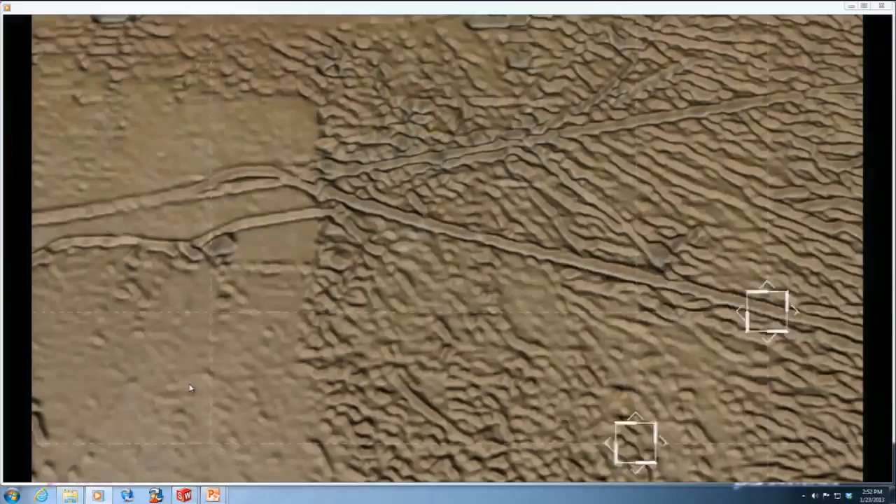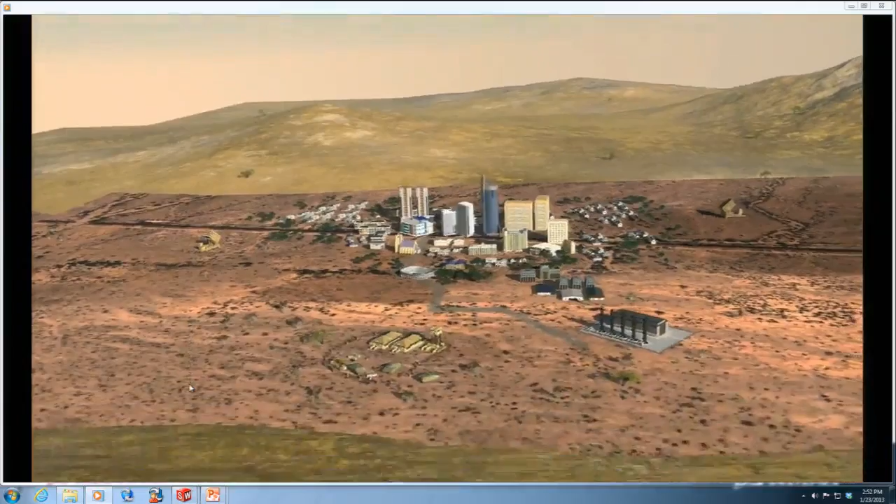The system is mobile, deployment is rapid, and maintenance is simple and user-friendly. A single launcher protects the area of a medium-sized city or strategic installations. The system can protect stationary or mobile forces against short and medium-range threats.

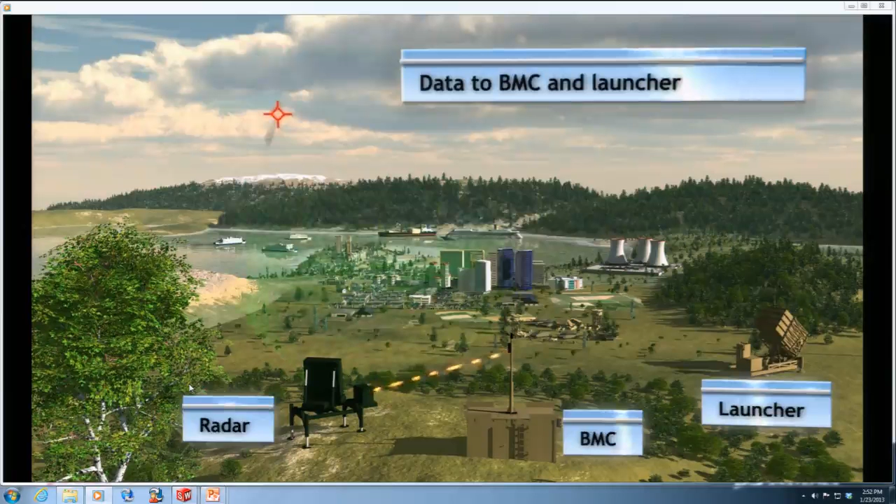The radar detects and tracks the threat. The data is transferred to the BMC and to the launcher, and from launcher to interceptor. The interceptor seeker achieves very accurate end-game homing.

Fully linked to other command and control systems in the arena, Iron Dome exchanges data with other sensors to maximize its combat efficiency and avoid fratricide.

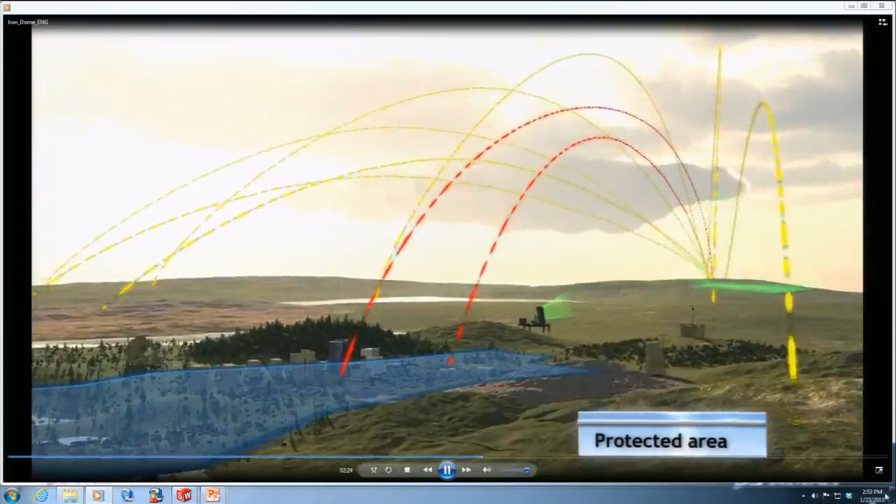The system estimates the tracked threat's point of impact and selects to intercept only those that will fall in the protected area. This prevents unnecessary launches against non-threatening targets and makes Iron Dome a very cost-effective system.

The innovative system has proven its capability to detect and home in on small targets flying at high speed and over a large area, even in severe weather conditions.

Iron Dome operates automatically, day and night. The system intercepts all short and medium-range threats and destroys them safely outside the protected area.

The detonation of the revolutionary interceptor warhead is precisely timed to ensure destruction of the incoming threat's warhead.

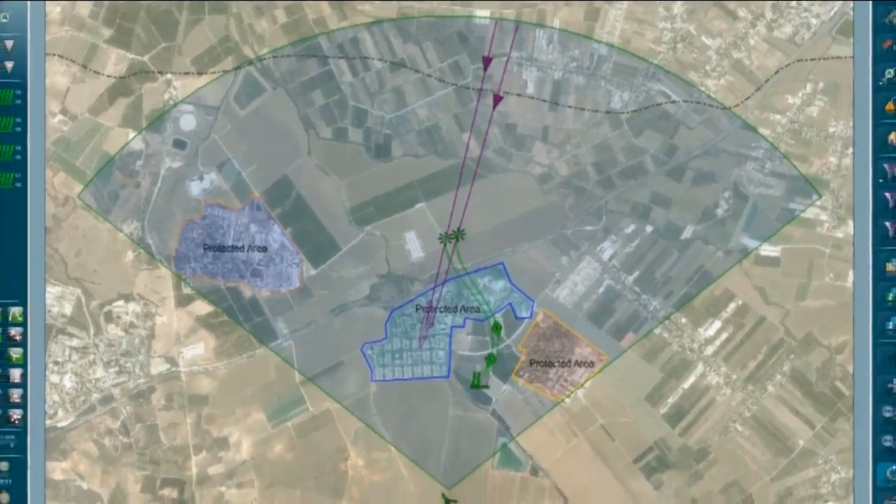At an unprecedented pace, Rafael has developed the first-of-its-kind and only operational system in the world for the interception of a wide range of short and medium-range rocket and artillery threats.

Iron Dome is a very cost-effective system, selecting out of multiple threats and concentrated salvos only those threats that endanger the protected area.

Groundbreaking technological innovation to eliminate the threat of rockets and artillery, and to provide civilians and armed forces with the security they need and deserve. Iron Dome.

Okay, that was just a bit to understand the importance of time to market and getting out a good product.

In mid-November, during Operation Pillar of Defense, which was not very fun for us, Iron Dome intercepted hundreds of rockets that didn't land on our people. So that's just really important.

Okay, now that's Rafael, and let's understand what our environment is like at Rafael when we go back to the CAD.

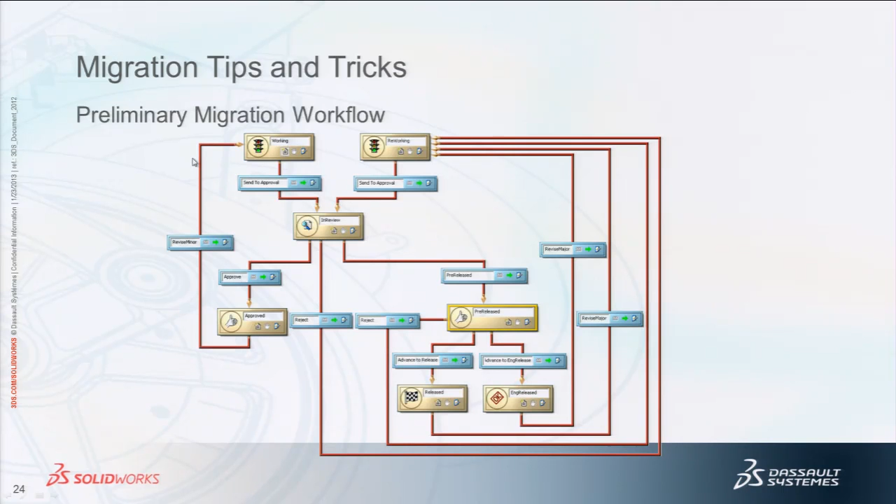When you remember that simple flow that I had shown before of what the statuses in workgroup were like, that's basically what we thought we'd have to set up in the workgroup, in the migration workflow. But, I mean, this is what we thought it would look like. A little bit more than what we had before, but that didn't quite work out.

This is what our migration workflow looked like. But don't worry, everything went through all that spaghetti. We always used to call it the spaghetti workflow. This is just because in workgroup, you can change every status to every status, and it just happened because someone called us and said, well, I can't do something, and then we would look at it and say, okay, I guess we'll move it to that different state, and then you'll be able to do it then.

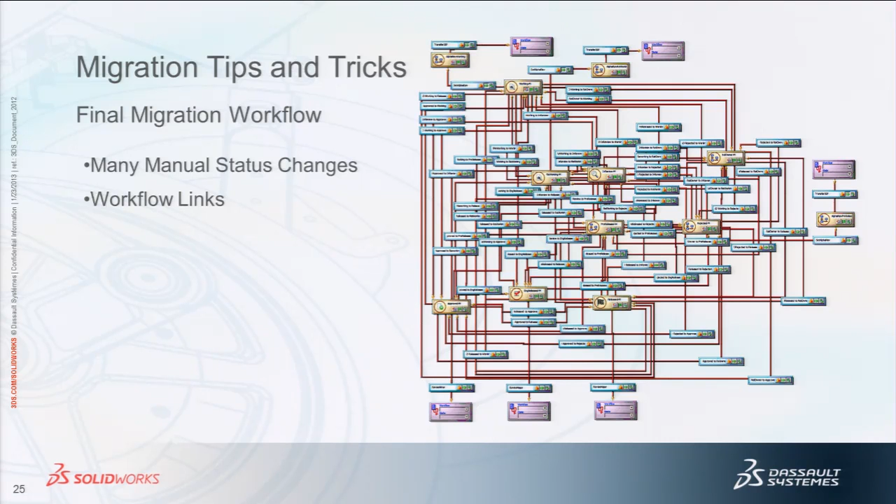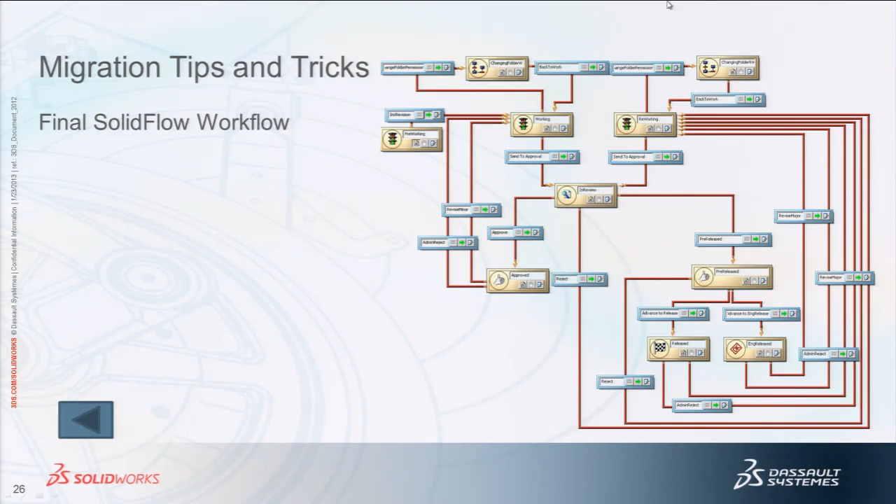So basically what we did when we were setting up the migrations is we created an empty vault and we set up all user permissions that we needed, and then for the groups we set up what permissions we would need, all the different settings on the vault that we would need. And then we exported this into an export file, since we have 6 vaults, so each vault we had to migrate separately, so we had to make sure that we would keep it as unified as possible.

So we would export, we put together the whole vault the way we needed it, all the permissions and settings that we wanted, and then we exported this. We set up a whole Excel file of exactly what permissions each group needed.

Actually, there is a user that's used by SolidFlow that we also had to make sure that we always got the permissions right. So we have to be very organized. I put together a document that told exactly what has to be done before you do the migration to set everything up to work, then during the migration, and then after the migration.

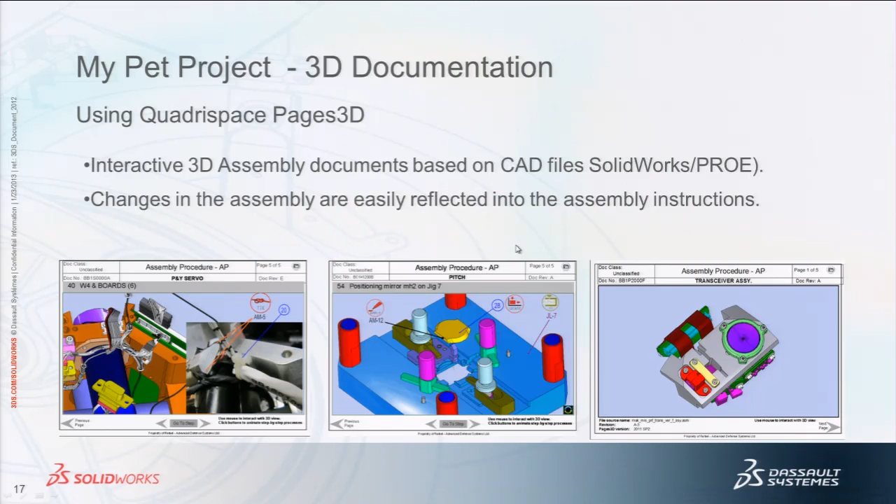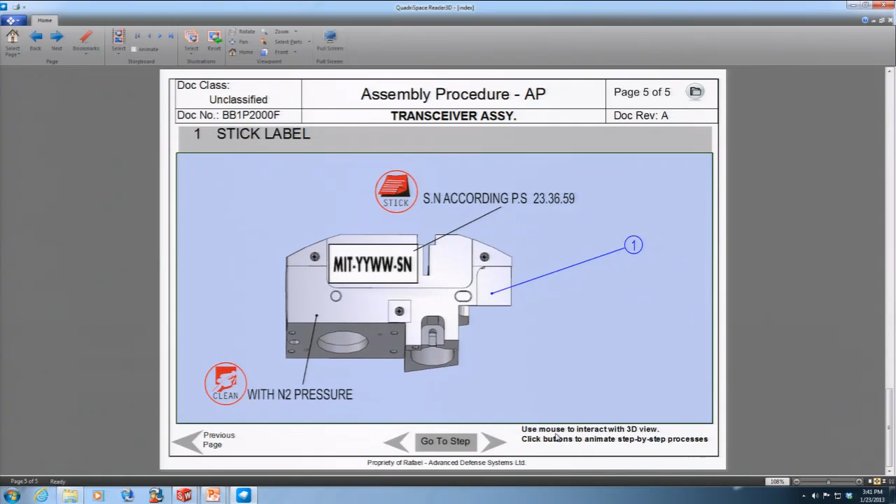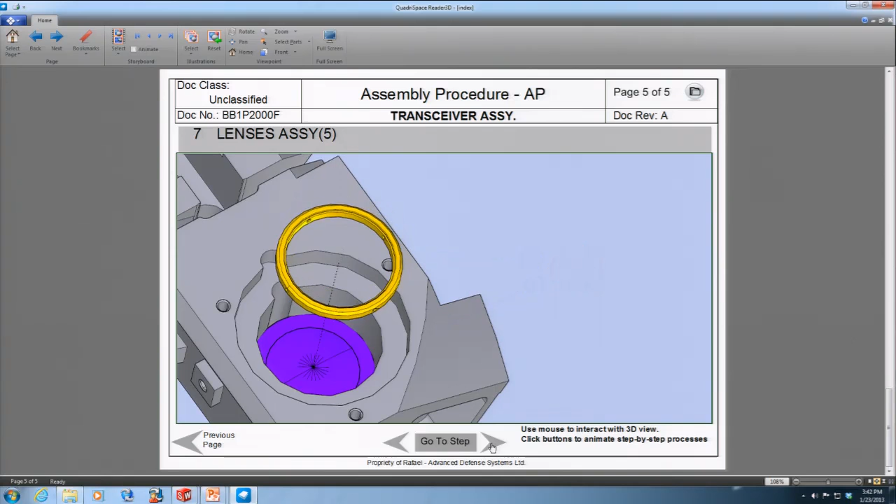Just to think, we might end up seeing this as the way the assembly line works. I'll jump ahead a bit - these are the people on the assembly line, and this is the procedure they use to know what to do next. They press next, next, next in order to fully understand what needs to be done during the assembly process. This is just one of the little things we're always looking for - new technologies.